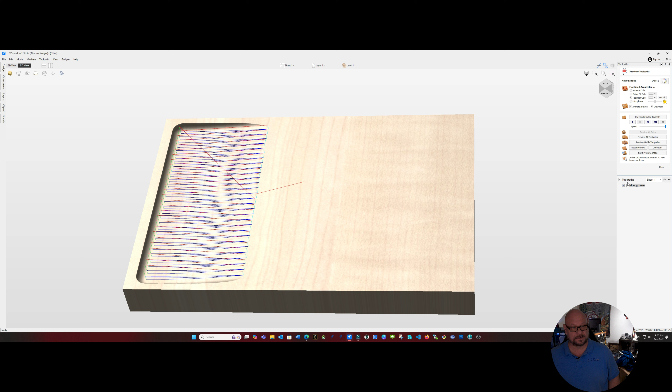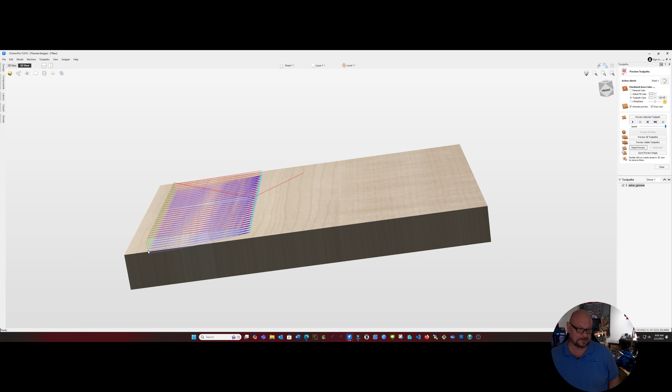And we will go ahead and take a look. As we see, our groove should be starting here and ramping down to the depth of our cut at the left-hand side. And we'll go ahead and preview that.

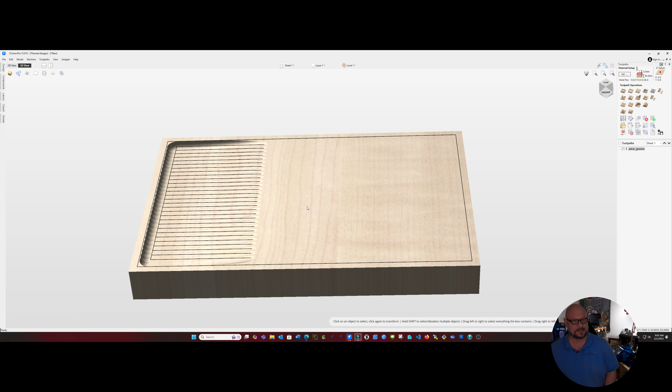The animation is done. We'll see we've got our groove cut, and you'll notice that we have an area here on the left hand side that needs to be cleaned up. That's where our secondary toolpath is going to come into play here, and for that we're going to use a profiling toolpath. Go to the same depth of 6.35, and we're going to use our ball bit again, and this time we're going to go on the line.

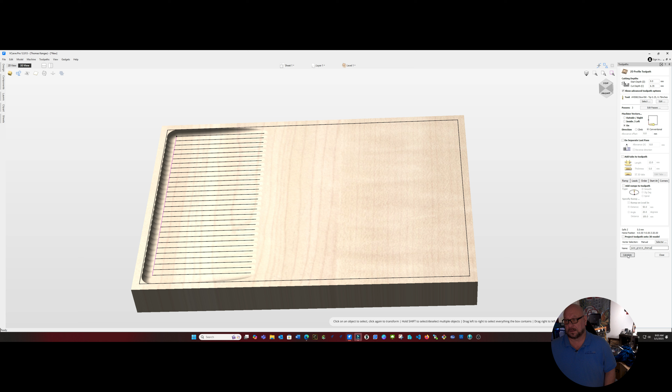So we'll highlight our vector, and we'll call that juice groove cleanup. And we will calculate that. And now if we run that path, we'll see that it cleans up our juice groove nicely.

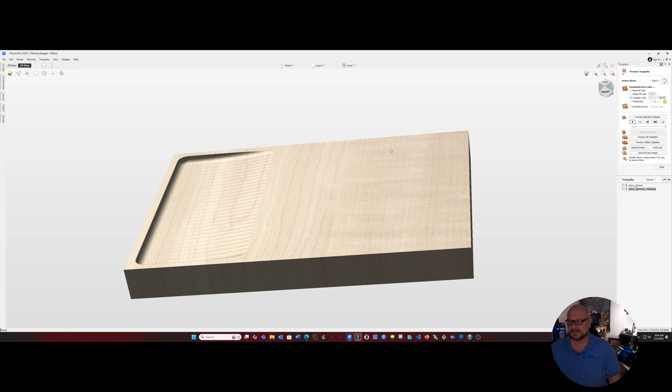Now, there probably will still be a few witness marks along the way, but those can be hand sanded out as part of your normal sanding routine. So now the only thing we have left to do is take it out to the CNC and get her cut.